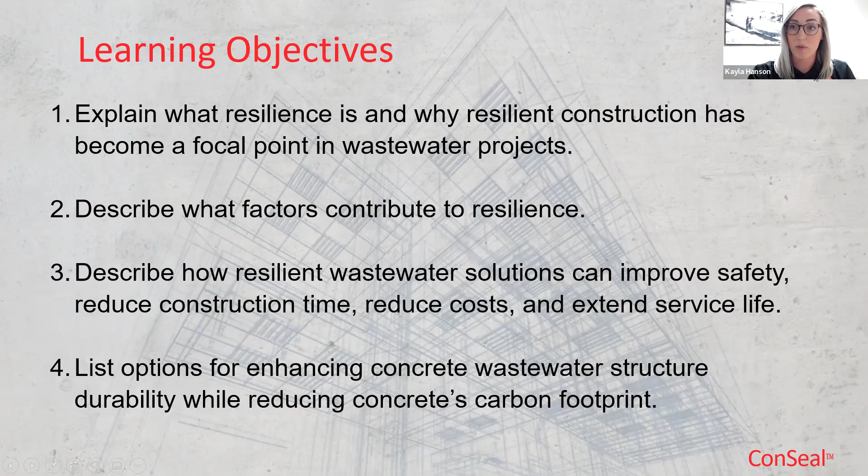I want to start this session out with a little trivia session. It's not so much a quiz and a test of knowledge as it is just an opportunity for us to think about some facts and figures specific to US wastewater infrastructure. Since we're virtual, you don't have to raise your hand, but just quiz yourself in front of your own computer and give these questions some thought.

Question number 1: How many publicly owned wastewater treatment systems are there in the US? Is it 14,000, 15,000, or 16,000? The answer is a little over 16,000. So what this tells us is that there's a lot of maintenance, cost, and upkeep associated with these 16,000 publicly owned wastewater treatment systems.

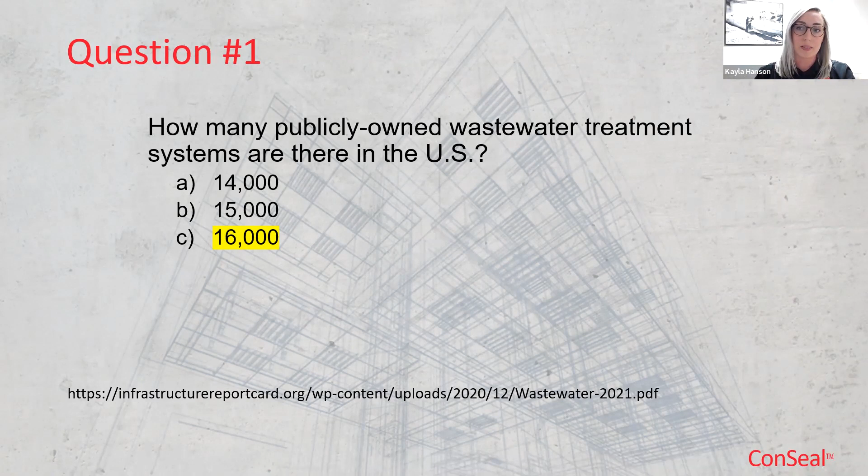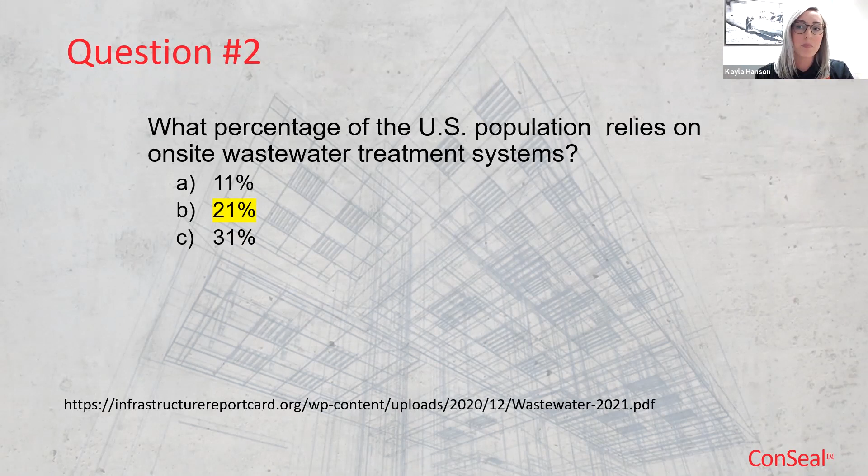Next question: what percentage of the US population relies on on-site wastewater treatment systems? Is it 11%, 21%, or 31%? This one typically surprises people, it's 21%. And the point here is that's almost a quarter of the US population relying on on-site systems, a much bigger portion than people tend to think.

The third and final question: across all sizes of wastewater treatment plants, systems are operating at an average of what percent of their design capacity? Is it 62%, 75%, or 81%? The answer here is 81%. At first thought, you might think, oh gosh, 81%, that's not so bad, that's the best news we've heard so far. But I want to remind you that this is an average. So what that means is that some plants are operating at 50% capacity, while others have met or are trying to exceed their capacity.

The point of sharing these statistics is to share the scope of the need and the demand we're facing. Whether we choose to move forward with on-site systems or centralized systems, truly it takes a combination of both. But whatever the solution, we've got limited resources and increasing needs to tend to. So it's increasingly important that we look to durable, resilient solutions to meet these needs and make the most of the resources we have available.

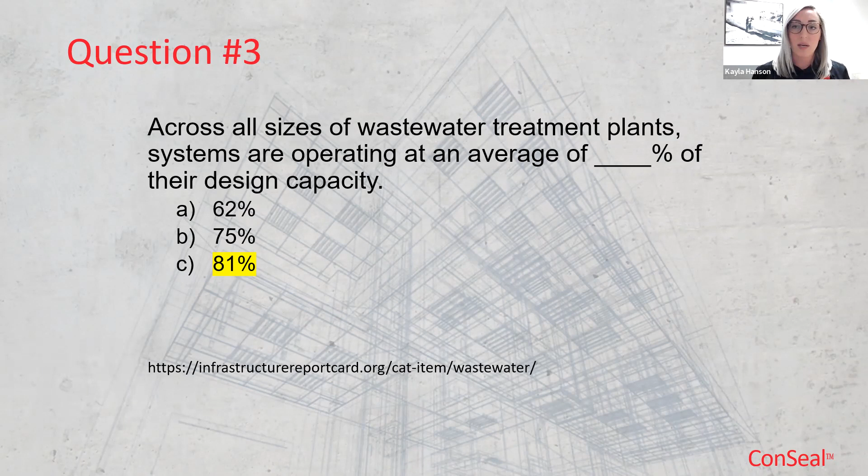A few more facts and figures here, all from the infrastructure report card. By 2032, it's expected that 56 million more people will attempt to connect to centralized treatment plants, a 23% increase in demand. Recall, on average, these treatment plants are already operating at 81% of capacity, so we're trying to add another 23% increase on top of that. Additionally, wastewater infrastructure needs, including repair, rehabilitation, and new construction, exceed $271 billion. There's a lot of demand here.

Third, the Clean Water Act is turning 50 this year. Why does that matter? Well, when it turns 50, it doesn't just expire. The key here is that a lot of wastewater treatment facilities, plants, and systems are designed with a 40 to 50 year service life. So with the Clean Water Act turning 50, a lot of these structures put into service around its inception are approaching the end of their design life.

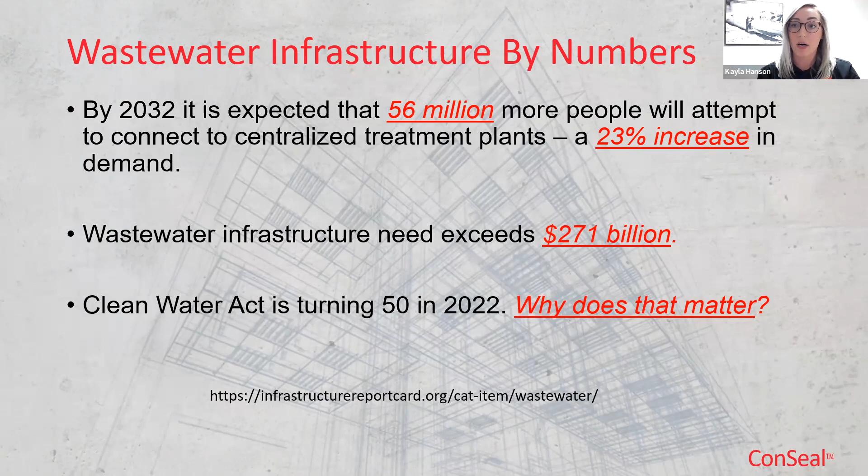They're approaching the end of their anticipated service life. So that exacerbates the need for additional construction, additional rehabilitation, additional repair, and additional new construction.

So I want to talk a little bit about the infrastructure report card. ASCE, the American Society of Civil Engineers, every few years assesses each state in 18 different infrastructure categories, everything from wastewater, stormwater, roads, bridges, airports, dams, schools, levees, you name it. They assess each state on these categories and give them a grade on an A, B, C, D, or F scale.

Overall, the US's grade for wastewater infrastructure is a D+. It sounds pretty abysmal, and it is, but it's actually improved over the last couple of years. Previously it was like a D or a D-, but these grades are really eye-opening, and the information they have on their website is really telling.

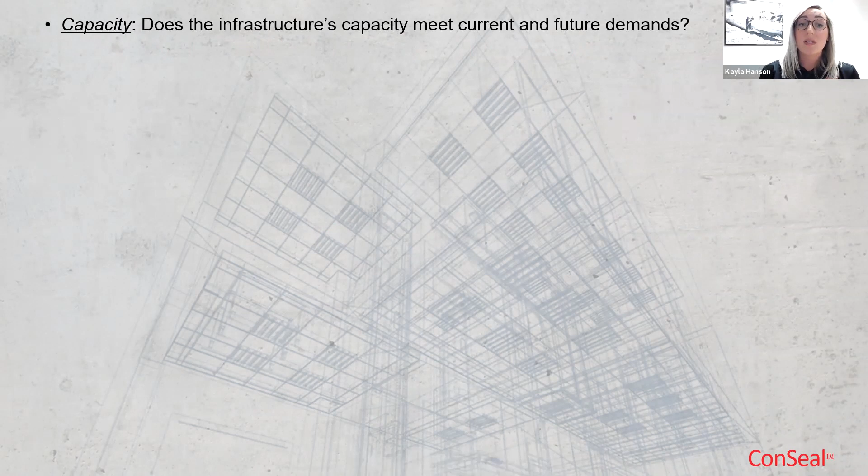So what goes into one of these grades? Let's take a look. The first factor they consider is capacity: does the infrastructure's capacity meet current and future demands? What about its existing condition right now, as well as its near future physical condition?

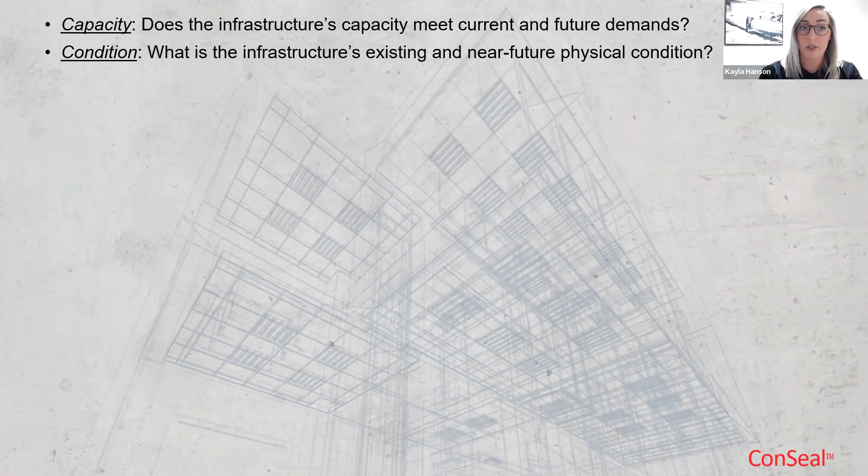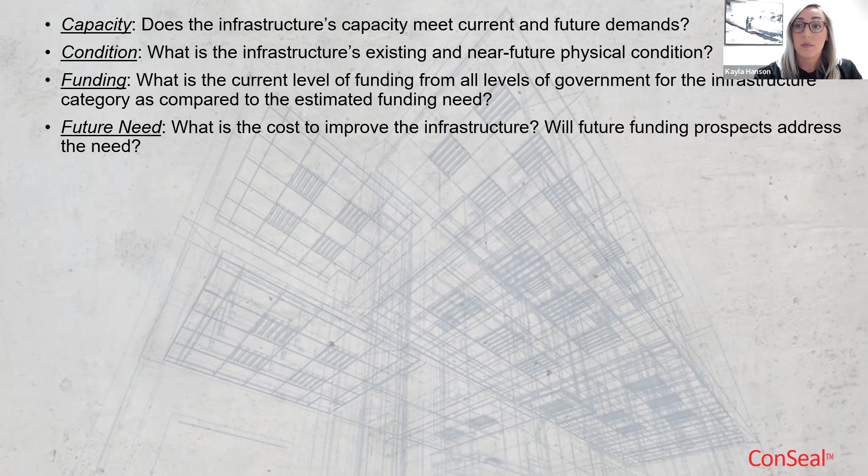What about funding? What is the current level of funding from all levels of government for this infrastructure category compared to the estimated funding need? What about future need? What's the cost to maintain and improve the infrastructure? Will the future funding prospects address the need that exists, or will we have a deficit?

What about operation and maintenance? What is the owner's ability to operate and maintain this infrastructure properly, and is it in compliance with government regulations as codes and standards change?

What about public safety? To what extent is the public safety jeopardized by the condition of this infrastructure, and what could be the consequences of failure? We'll talk about failure a little bit more later.

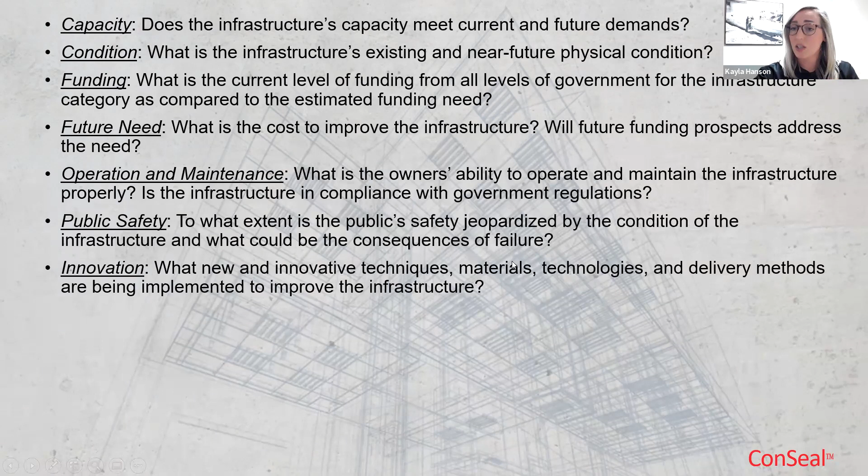What about innovation? What new and innovative techniques, materials, technologies, and delivery methods are being implemented to improve this infrastructure? And last but not least, resilience. What is the infrastructure system's capability to prevent or protect against significant and multi-hazard threats and incidents? How able is it to quickly recover and reconstitute critical services with minimum disruption, with minimum consequences to public safety and health, the economy, national security?

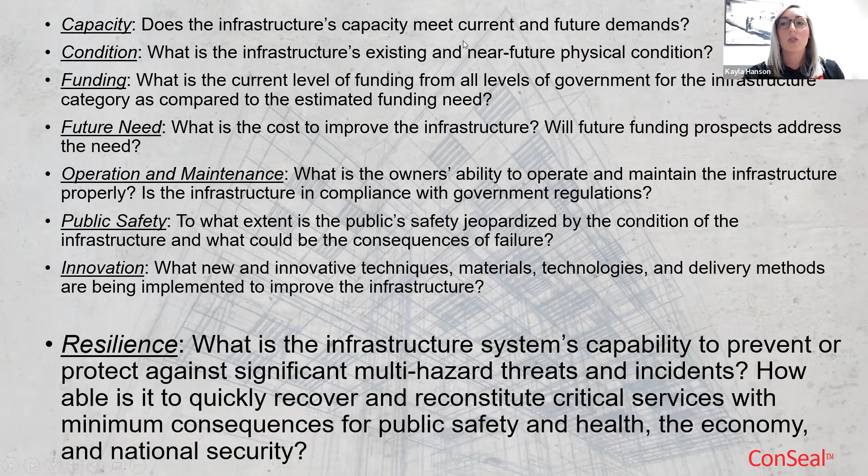So what is resilience? Resilience is the capacity to adapt to changing conditions, and it's the ability to maintain or regain functionality and vitality in the face of stress or disturbance. It's the ability to bounce back after a disturbance or interruption. It's also the ability to absorb or avoid damage without suffering complete catastrophic failure, and the ability to rebuild or repair faster and for less cost.

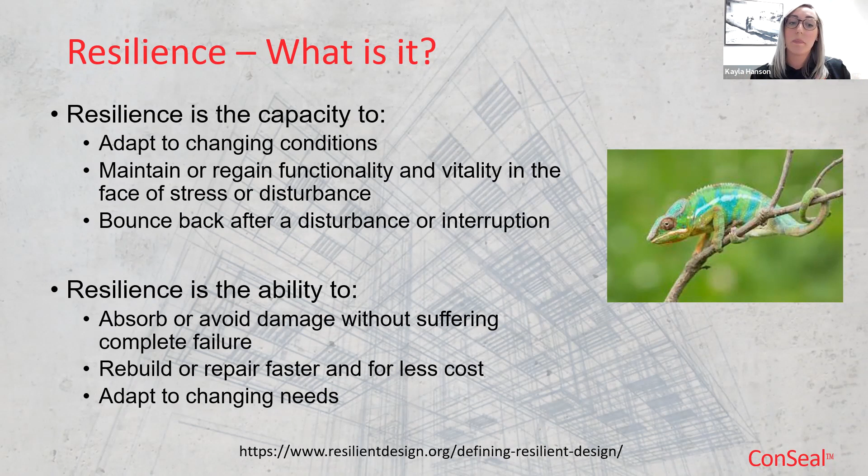It gives us the ability to adapt to changing needs, because the needs we have today aren't going to be the same needs we need to keep in mind in 10 years, 20 years from now. It's the ability to regain and maintain functionality in the face of adversity, and the ability to rebuild or repair faster and for less cost.

Resilience provides protection against natural and unfortunate man-made disasters, including fires, hurricanes, floods, tornadoes, earthquakes, extreme heat, and terrorist attacks. In resilient design, we want failure to be predictable, and we want to make sure it's not catastrophic. We want it to be proportionate to the cause, or less severe in comparison to the cause, not disproportionate.

The double negative is kind of confusing, but essentially this can trip some people up because we're talking about being able to predict failure. In design, we anticipate certain loads, certain forces, certain flow rates, certain volumes. We know it's going to be a certain amount, and then we bump it up a little further for a more conservative approach. On top of that, we add in factors of safety to be even more prepared for outliers and extreme conditions. But when we're talking about failure being predictable, what we mean is that if something were to happen, we want to know how it's going to fail.

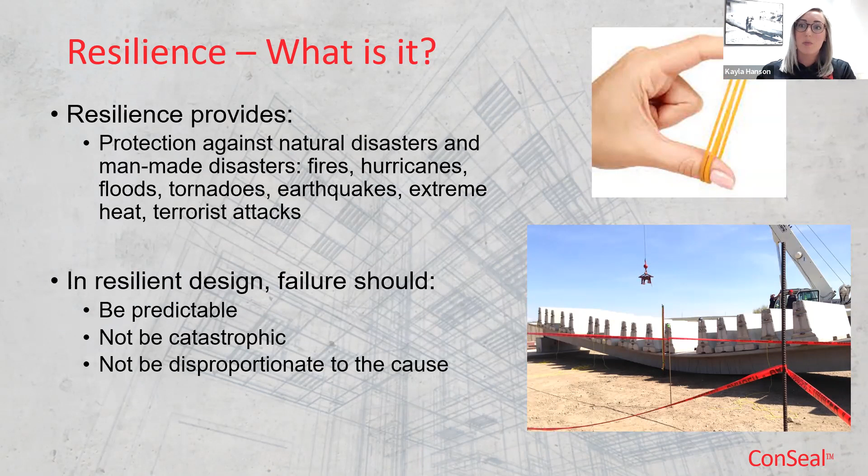So by planning for some outliers, putting in really conservative factors of safety, and designing with resilience in mind, we can gain those benefits without all that extreme cost. Really it comes down to a combination of sustainability and durability—we're building with durability as our focus, but applying sustainable principles and practices.

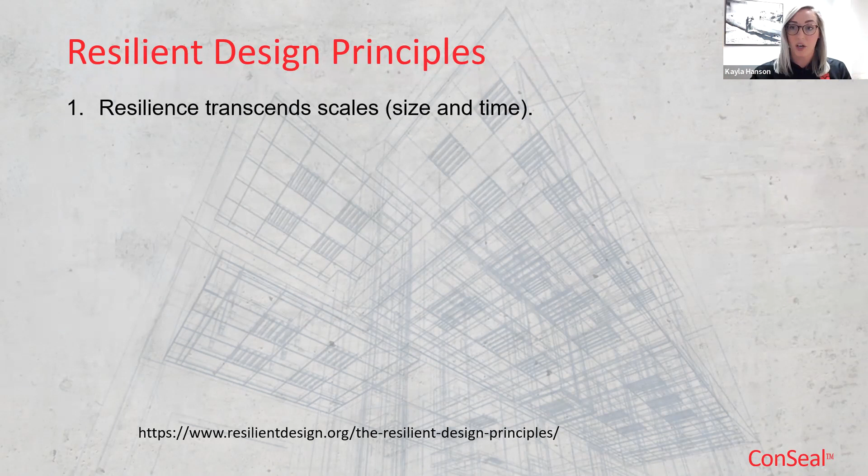It also transcends time. There are short-term things we can do immediately, and longer-term things we can plan for and build up to.

Additionally, diverse and redundant systems are inherently more resilient. The one example I always like to use is a bridge truss. If a single truss in a bridge would fail, the entire bridge isn't going to come crashing down. That would be incredibly catastrophic, dangerous, and too risky. So there's redundance in that design. If one of those members or components of the truss would fail, the system is still going to stand up. It's still going to be fine. So having diversity and redundance in these systems will make them more resilient, more likely to stand up to adversity, whatever that may be.

Additionally, simple, passive, and flexible systems are more resilient. The more bells and whistles and contraptions and reliance we have on electricity and Wi-Fi and things like that, those are all things that could fail, all things that could go wrong. So when we're relying on simple or passive systems, like gravity separation in a septic tank, or a leach field to treat effluent, those are passive systems. They just happen on their own. We don't have to interrupt them, or hope that the generator kicks on and keeps everything up and running. So when we have these simple and passive systems, they're more resilient.

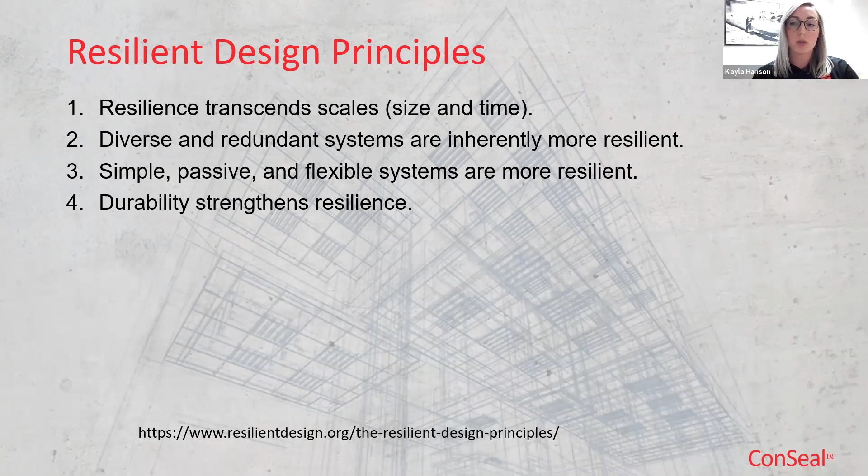Additionally, durability strengthens resilience. We're talking about resilience as a combination of sustainability and durability. The key here to resilience is standing up to adverse conditions and being able to rebuild faster in the face of adversity. So when we have durable, strong, long-lasting materials, that enhances the system's resilience.

Additionally, locally available, renewable, and reclaimed resources are more resilient. Whenever possible, we want to source these materials, source these structures, source these solutions in our local area. We don't want to have to rely on shipping something halfway across the globe to achieve this solution.

Additionally, resilience anticipates interruptions and a dynamic future, right? That's what we've been reiterating, that we want to prepare for the unexpected, prepare for changing needs, prepare for outliers and be able to stand up to them and withstand them in a way that we can bounce back faster after those threats have passed.

Additionally, we want to find and promote resilience in nature. The last presentation we had was actually about constructed wetlands. And when we see something in nature that works well, humans often copy it. It's not just specific to wastewater, it's true in a lot of different capacities. Think of camouflage, or the design of airplanes, for example. So whenever we can find resilience and success and ease in nature, we want to mimic it if we can.

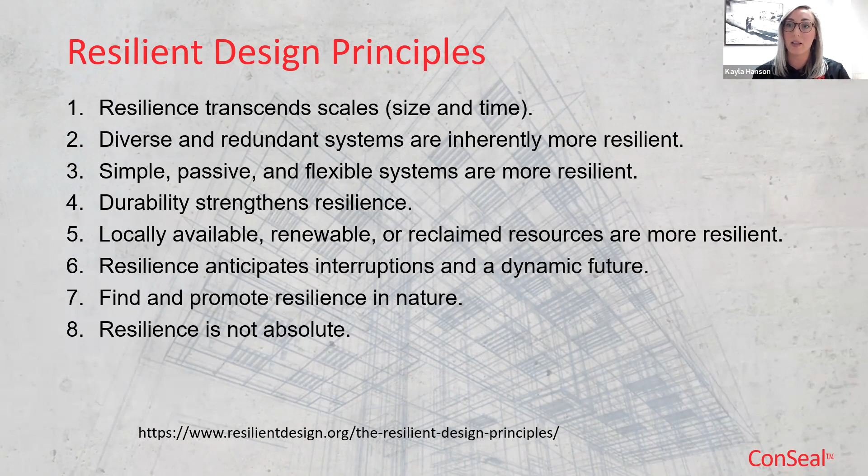And resilience is not absolute. It's not all or nothing. It's not something that we have to go from 0 to 100 immediately, or we're never going to have any improvement. There are small steps that we can take to make a difference and start to make our infrastructure more resilient. We don't have to go from 0 to 100 immediately to see improvement.

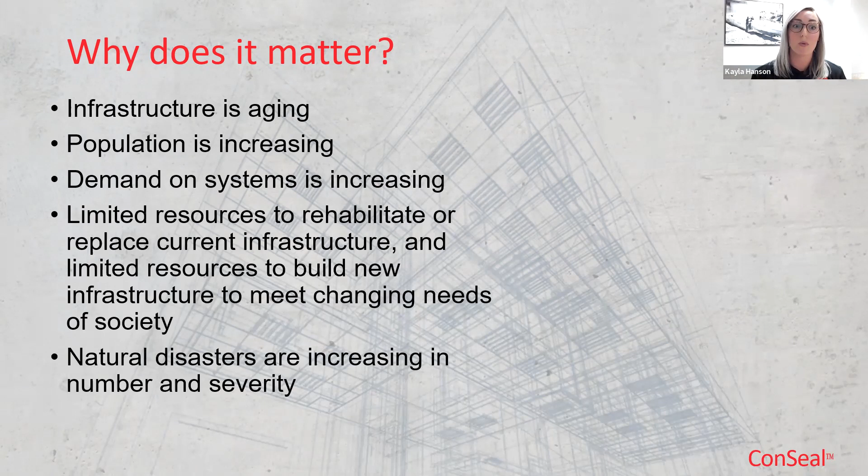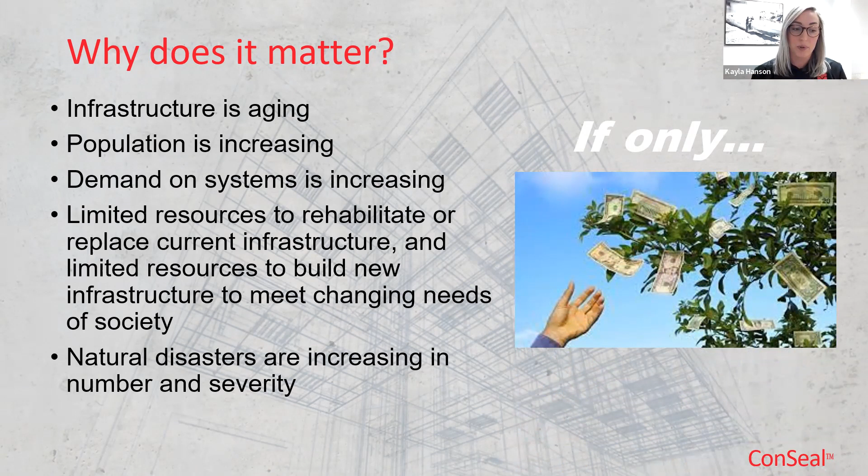So why does this all matter? Well, our infrastructure is aging, populations are increasing, demand on systems is increasing, and there's limited resources to rehabilitate and replace current infrastructure, and limited resources to build new infrastructure that meets our changing needs as society evolves and grows. And natural disasters are increasing in number and severity. Now, even if money grew on trees and we had unlimited resources, it still wouldn't really solve these root problems and provide solutions to these challenges.

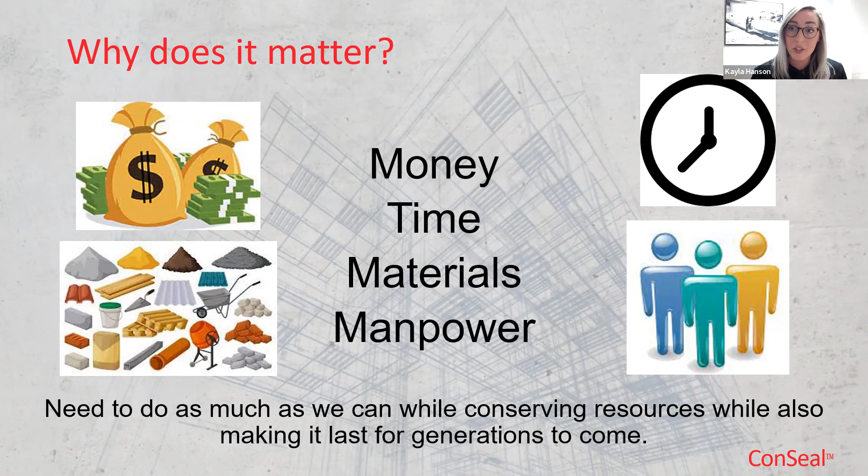So it comes down to money, time, materials, and manpower. We need to do as much as we can while conserving resources, while also making these solutions last for generations to come. And it sounds daunting, and at times it can be, but it's completely doable. It's completely feasible. We know how to do it. We have the roadmap to achieve this.

So how do we do that? Well, resilience really needs to be the goal of design, the goal of maintenance, and the goal of restoration for both individual structures, entire infrastructure systems, and entire communities. And it begins with comprehensive planning. This also means stricter codes and standards that will produce more robust structures and systems that have long service lives. A lot of times people think, well, gosh, codes and standards, don't like that, it just makes my job harder.

When we talk about stricter codes and standards, the concern is that it's going to make people's jobs harder. But that's not the intent, and that's not really realistic. The idea behind making codes and standards more robust is to give us better solutions, to challenge the status quo, and make us think about better raw materials we can use and stronger design philosophies we can implement, not just satisfying our current need but also thinking about long-term solutions.

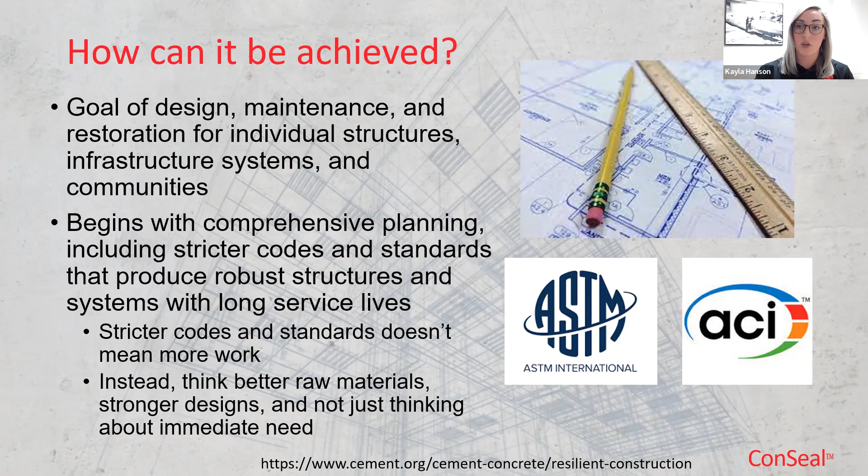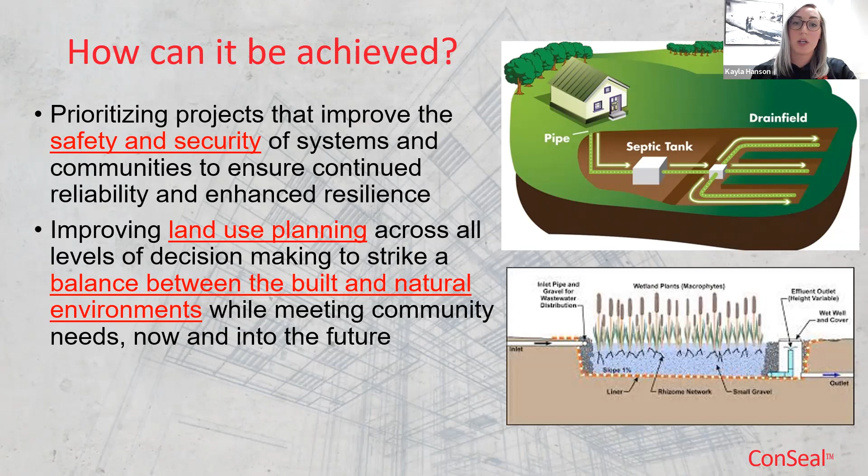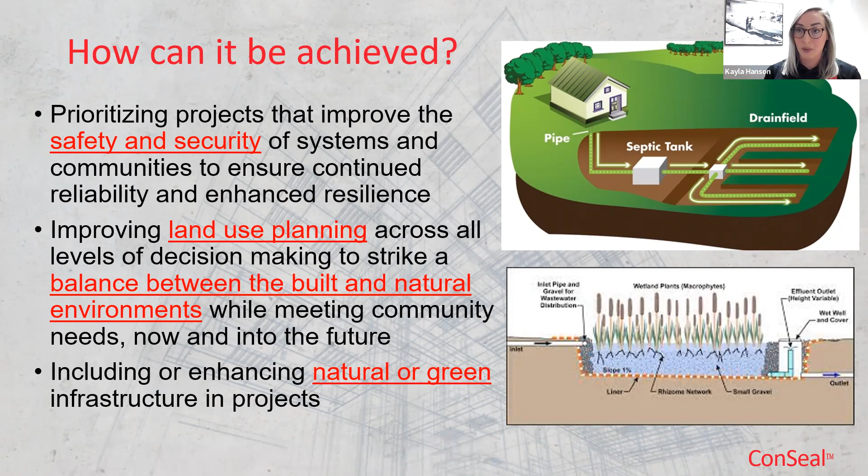Some other ways we can achieve this is by prioritizing projects that focus first and foremost on safety and security, improving safety and security of systems and communities to ensure continued reliability and enhanced resilience. Also improving land use planning across all levels of decision making, striking a balance between the built environment and the natural environment, and including or enhancing natural or green infrastructure projects, which comes into play a lot in on-site applications.

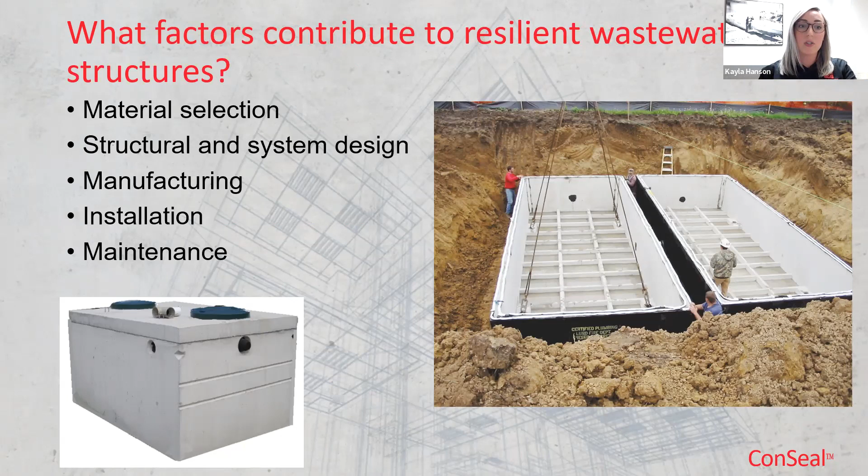So what factors will contribute to resilient wastewater structures? Well, first and foremost, it starts with material selection, then structural and system design, manufacturing, installation, and maintenance. We're going to talk about all five of these subtopics a little bit.

First up is material selection. When we're looking for materials to build these wastewater systems with, we want to select materials that are strong, that are durable, that are appropriate for their intended use, and that have sustainability and their environmental impact in mind. We want to make sure we're selecting products that will stand up to the environment they're going to be exposed to for their entire service life.

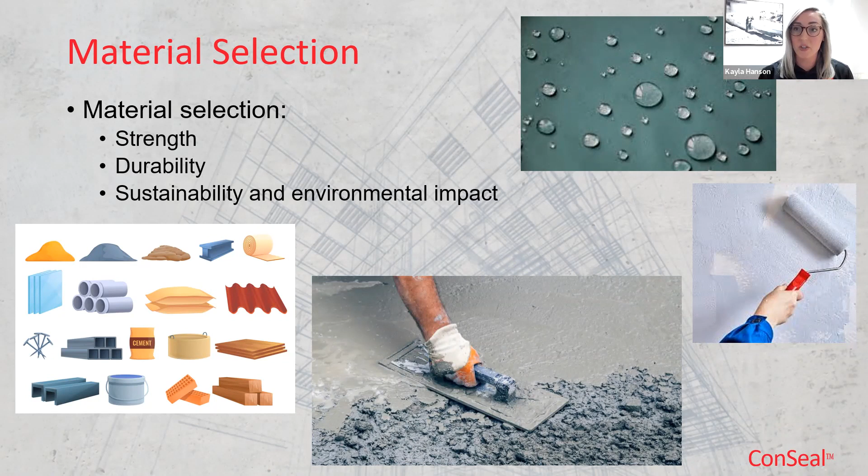We want them to provide durability, we want them to provide long service lives, and we want them to be able to resist these harsh conditions and be able to bounce back.

Then talking about strength and durability, specifically in wastewater applications, we need these materials and structures to be resistant to leaks. They have to be watertight. We need everything inside these structures and systems to stay inside until they're ready to go out through the intended outlet, and we need everything outside of these systems to remain outside of the systems.

We don't want any infiltration or exfiltration, because if water or rainwater infiltrates the tank and comes inside, it'll disrupt the treatment system going on inside the tank. And of course, we don't want anything outside the tank to leak out, because it could contaminate the surrounding environment.

So these structures need to be resistant to leaks. They need to be resistant to freeze-thaw cycles, abrasion, chemical and biological attack, thermal fluctuations, and impact, just to name a few.

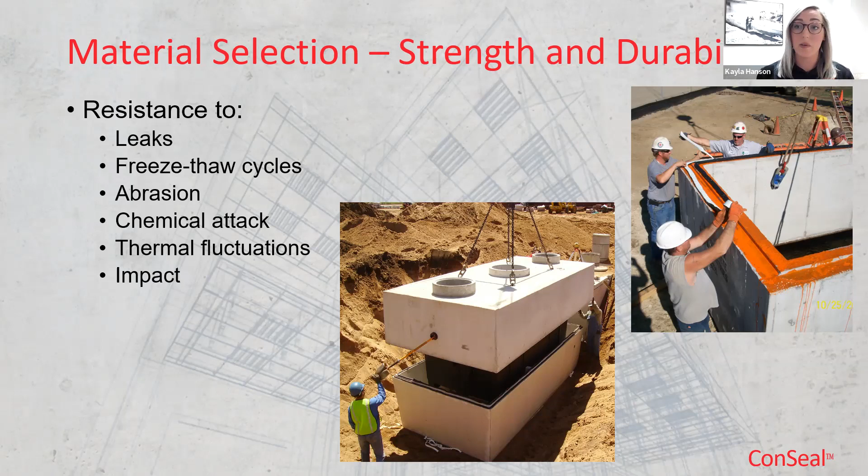We're talking about resilience being a combination of both sustainability and durability. So it's important to also think about the sources of these raw materials. There are naturally occurring raw materials that work great, there's recycled options, there's man-made materials, and we want to think about the energy intensity of the manufacturing process of these materials, and whenever possible, source these raw materials locally.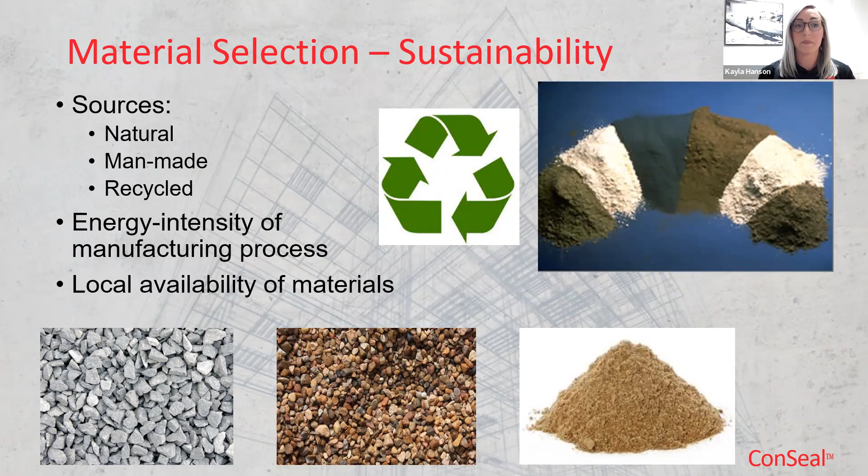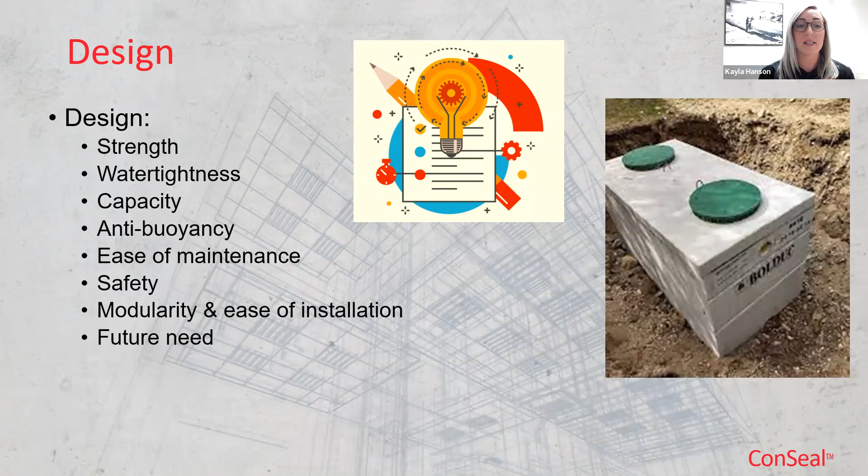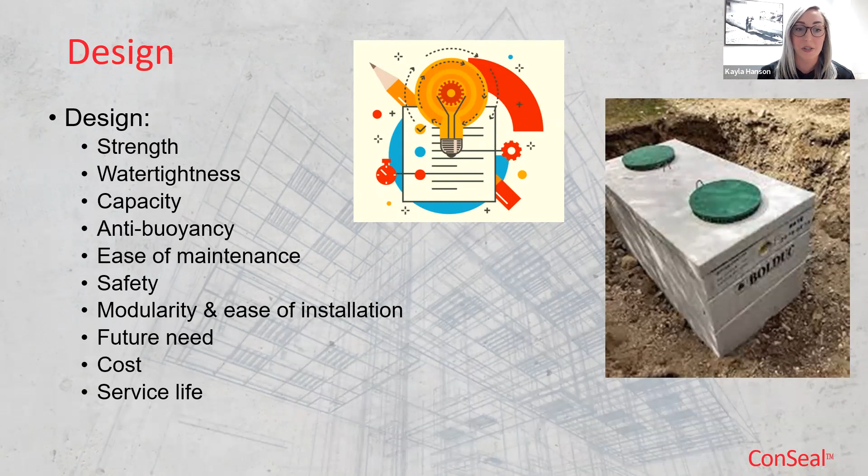Now when it comes to the design of these wastewater systems, we have to think about strength, water tightness, capacity, resistance to buoyancy, ease of maintenance, safety, modularity, ease of installation, future need, cost, and service life. There's a lot of factors that come into play here, and we're going to talk about each one of them.

First up is strength. When it comes to the design of these structures, first and foremost, it has to be strong. So we need to follow applicable codes and standards, and we have to select design options that will withstand the anticipated loads. We know these service conditions, we know the environment these structures are going to be installed in, and we also need to be prepared for outliers. Even when we incorporate factors of safety into the design, there's always going to be an outlier, so we have to be prepared for that.

So thinking about depth of bury, the soil loads, the hydrostatic loads, where is the water table when it comes to these underground structures. Sometimes we have to consider traffic loads and impact loads, and of course we're always taking into consideration a factor of safety.

Now on the far right here, I have a screenshot of ASTM C1227. This is a product standard for precast concrete septic tanks.

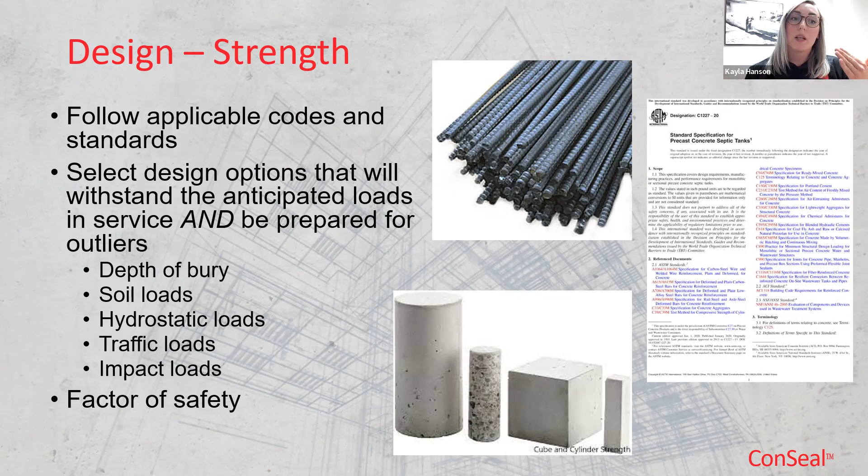This outlines requirements for raw materials, the manufacturing process, testing, design, dimensions, you name it. Following these codes and standards helps ensure a certain level of reliability. If anybody's just making a septic tank without following any particular roadmap to success, we don't really know what we're getting in terms of quality, reliability, and service life. So following applicable codes and standards is critical in these applications.

We also need to design for water tightness. We want to select designs and materials that enhance water tightness to protect not only the integrity of the system and its performance inside the treatment system, but also the surrounding environment. We want to keep what's in the tank, and what's outside of the tank. This also impacts the health and safety of the surrounding environment.

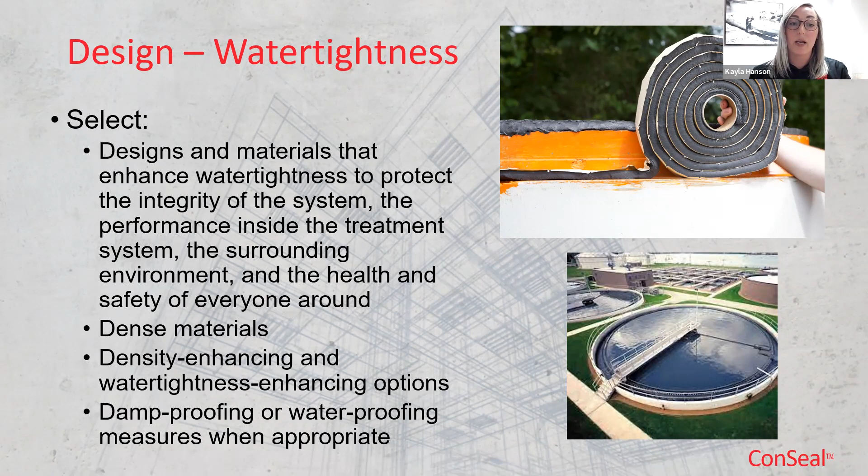So we want to choose dense materials. In wastewater applications, if we choose strong, dense, durable materials, water, wastewater, and contaminants are less likely to penetrate those walls. So dense materials, low permeability, low porosity, help enhance the water tightness of these structures. In many applications, we can choose density-enhancing and water-tightness-enhancing options—we'll talk more about that near the end. In addition, we can take additional measures to help damp proof and waterproof these structures.

What about capacity? We're talking about codes, standards, and regulations, and there are sizing regulations as well. At least in the US, they're generally pretty consistent, but there is some variation from state to state. We want to make sure we're selecting design options that meet our current needs but also accommodate future needs and some growth. We can have too much of a good thing—we can oversize these systems, and we don't want to do that, but we want to be reasonable and accommodate some reasonable growth.

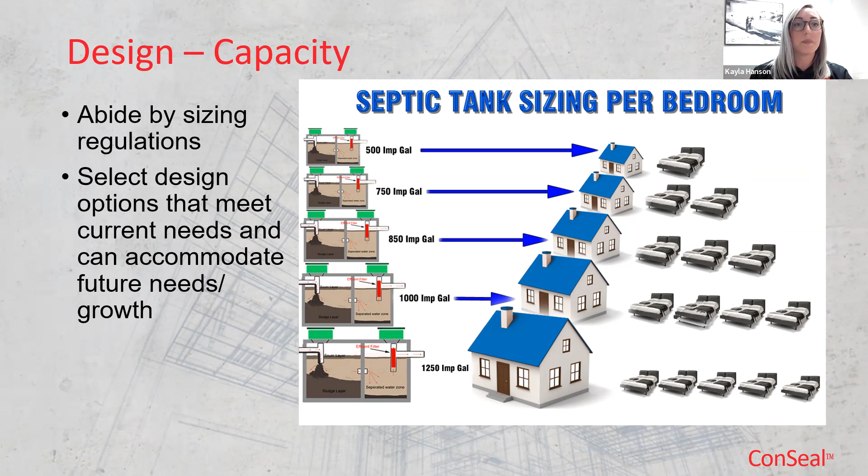Now, what about buoyancy? Typically when people think about buoyancy, they think of things that float in water or air. But in the case of buried structures, in the case of underground infrastructure, these structures can float or shift depending on the water table, the soil conditions, the weight of the structures, and the amount of soil backfilled and buried over them. So we can have instances where these structures will float, pop up out of the ground, or shift if we don't account for those buoyant forces properly.

So we want to make sure we're selecting design options that will resist these buoyant forces—remember, passive and simple systems are inherently more resilient. So selecting options that are inherently resistant to buoyant forces, denser, heavier materials when these structures are buried, providing fail-safe resistance to buoyant forces, and being able to withstand forces that arise in out-of-the-norm conditions.

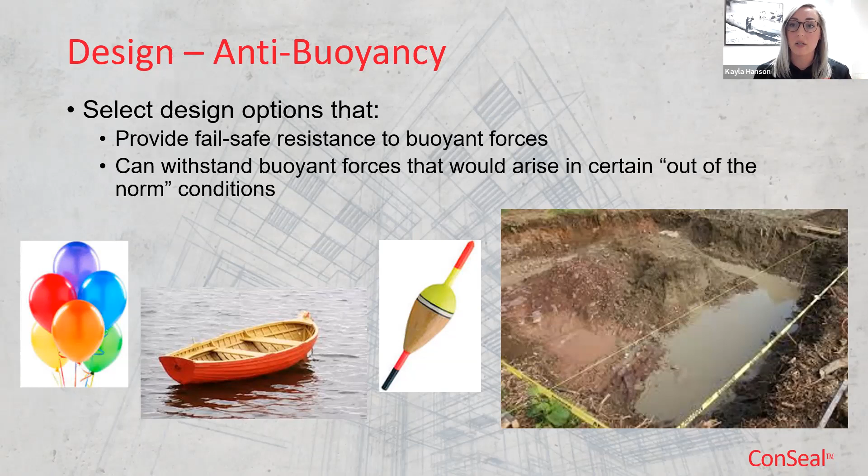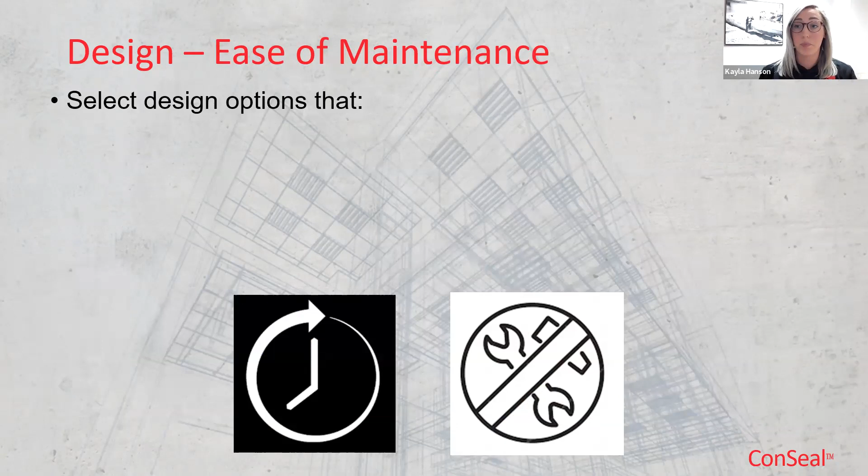So you have a 100-year storm, and we already have a high water table. We want to make sure that even in these outlier, extreme cases, we're able to resist these buoyant forces. We also want these structures to be easy to maintain—this is a huge part of resilience. We don't want to have to go back and constantly repair things or install something new or updated. We want them to be low maintenance, to set it and forget it, with the exception of some routine preventative maintenance.

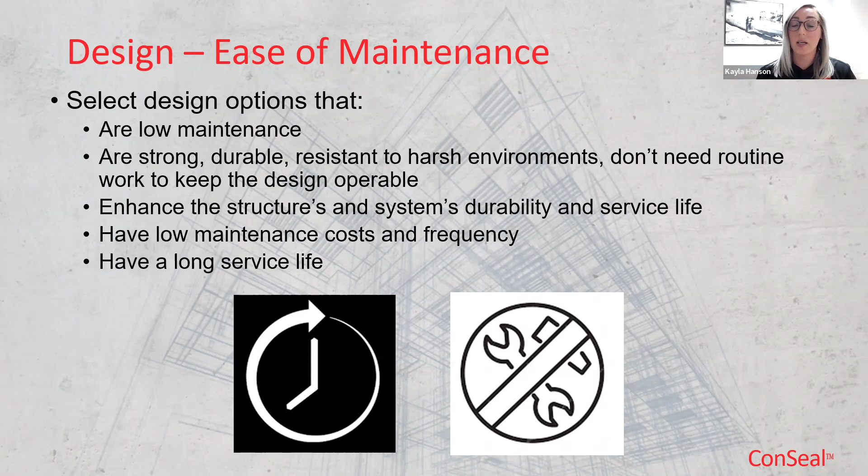So we want to select design options that are low maintenance, inherently strong, durable, resistant to harsh environments, and that don't need a lot of routine work just to keep the design operable. We want to select options that enhance the structure's and system's durability and service life, which in turn provides low maintenance costs and a lower maintenance frequency while giving us a long service life.

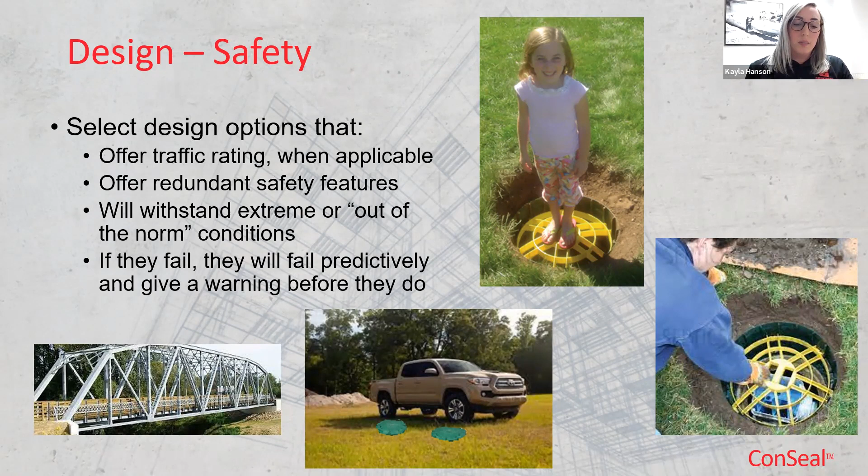We also want these designs to be safe. It seems so simple, but specifically when we're talking about underground structures or buried infrastructure, they'll often need to be designed to withstand traffic loads, so making sure these designs are in fact traffic rated when needed. We also want redundant safety features—we talked a little about that earlier—but if one of the safety features were to fail or not be operable, we want something else there to back it up.

So we're talking about the bridge truss example again. So that brings up this circular yellow contraption. This is specific to underground structures, specifically to septic tanks.

This is a secondary safety device where if the lid were removed or damaged and somehow wasn't keeping the septic tank contained, this secondary safety device is installed underneath the lid so that if the lid was damaged, removed, or not replaced, it prevents animals or people from falling into the tank. Oftentimes if a child or animal falls in the tank, they lose their lives.

So having redundancy in design and in safety is really important. We want to make sure that we're able to withstand these extreme or out-of-the-norm cases. And if they do fail, that the failure is predictable, not absolutely catastrophic. We know how it's going to fail, we know what's going to happen, and we can plan for it.

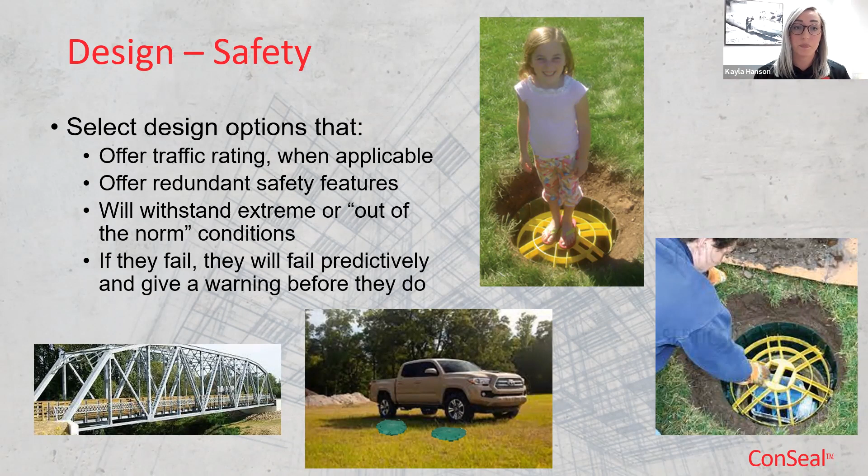Also, selecting design options that are modular and easy to install—this is a huge one. If we can select design options that are quick to install on site, with a whole bunch of these features installed at the manufacturing facility before it even gets to the job site, it results in less labor on the job site. So less cost, less time, and less labor on the job site.

And when we're able to install these things faster, when so much is already done—it's all modular, done before it even gets to the job site—we can close up this excavation faster, we can shut down this construction site faster. That results in cost savings and it really improves safety. We don't have this excavation open, we're not using all of this expensive equipment for days, weeks, months longer. It's done pretty darn quickly, pretty efficiently.

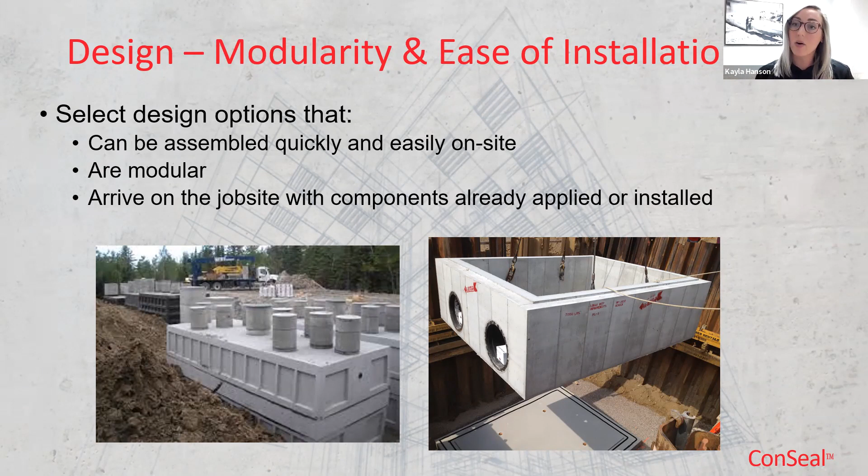So when we can have modular designs and components that are pre-assembled, pre-installed before they even get to the job site, that also enhances resilience.

We also want to think about future need—selecting design options that will accommodate future needs within reason, because we can't predict everything, and we can over-design it to the point where we're not really getting anything back out of it. So we want to make sure we're designing for future needs as best we can and trying to make these designs adaptable, and if possible, making them so they can be retrofitted to accommodate those changing needs or changing capacities in the future.

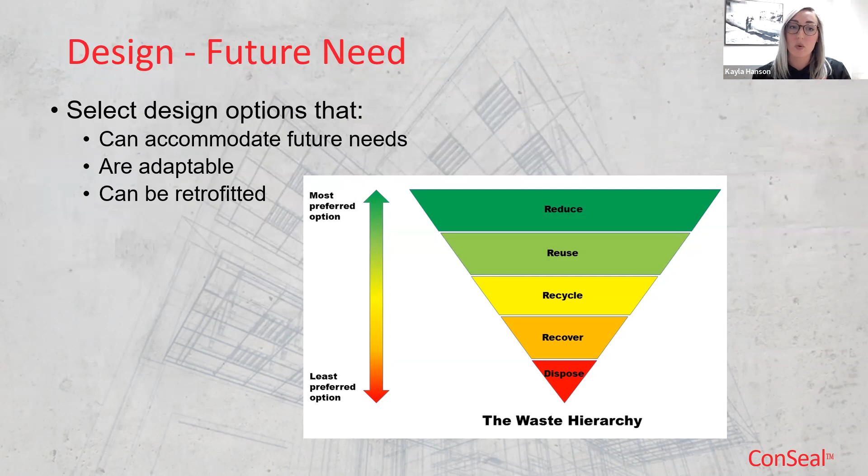We have to think about the costs that exist below that water line. Think about the maintenance needs, upgrade costs and frequency. What are the operation costs? How frequently do we have to inspect it? What do the repair costs look like? What does the disposal cost look like at the end of its service life?

So a lot of times, I'll pick on asphalt versus concrete roads—a lot of times cities and municipalities, if the roadway conditions are just atrocious, full of potholes, at least in the Midwestern US that's a big issue every year. Asphalt is cheaper up front compared to concrete, but the service life isn't as long. So to make the most impact in a short amount of time with as few resources as possible, cities will repave roads with asphalt, knowing this is a cheaper solution but it's not going to last very long. They know going in they'll have to repair or replace it in just a couple of years, but they're trying to do what they can with limited resources—though it doesn't solve any long-term problems.

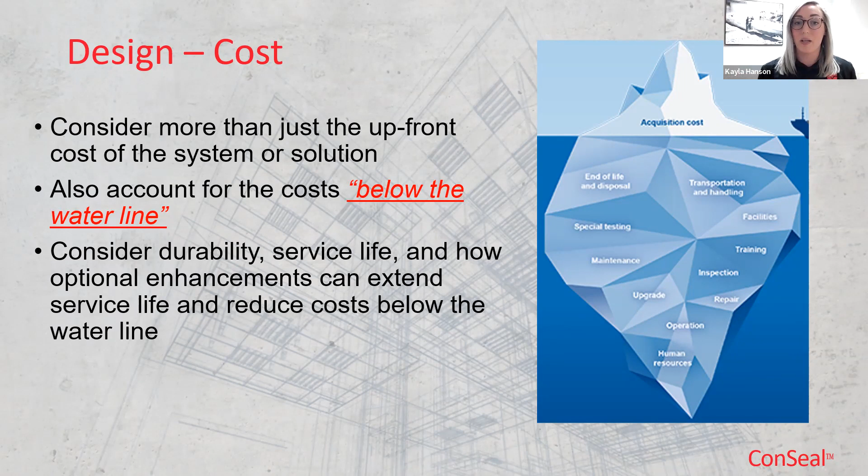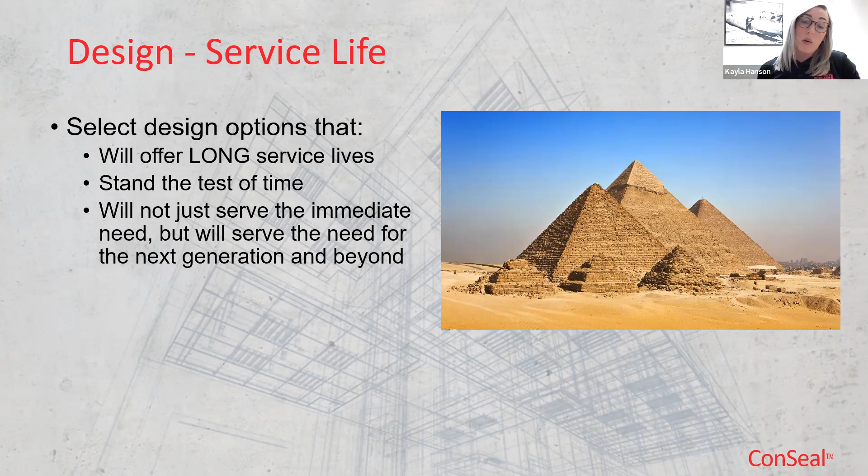Opting for these optional enhancements, which come at an additional cost over alternative solutions, can really extend service life and enhance durability and resilience. We want options that will last a long time. We don't want to have to come back and constantly repair something or replace it in just a few years. We want to select options that stand the test of time and serve the need for generations to come.

Manufacturing is another factor in resilience. We're talking about production processes, manufacturing duration, quality assurance, quality control, and testing. QA and QC are two totally different things.

Quality assurance is process oriented and all about preventing defects—it's a proactive approach. Quality control, on the other hand, is product oriented. It's about going back to check our work and our finished product to identify any defects—a reactive strategy. But together they make a complete system, and they help ensure that whatever gets installed and provides this solution meets our needs and expectations.

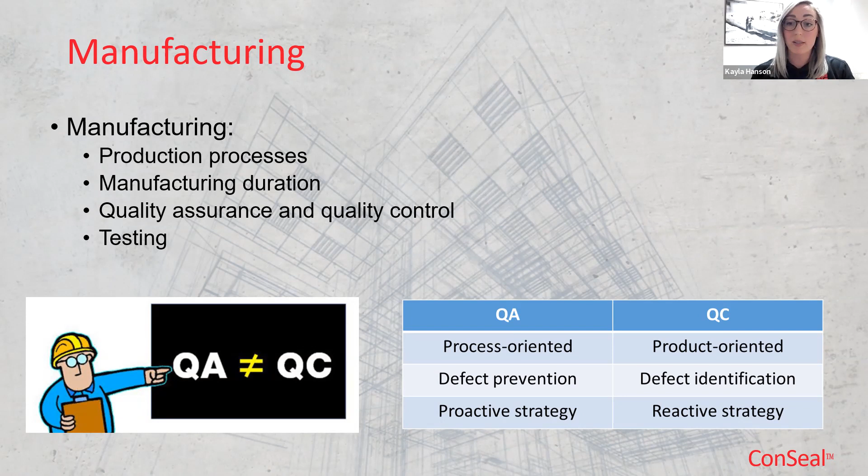When it comes to installation, it's always critical to follow the manufacturer's instructions and industry best practices. It's probably not something people typically think of when selecting resilient design options, but it's important to consider construction time and transport distance—remember, we want options that are locally available whenever possible—as well as handling, setting, bedding, foundation, and backfill requirements.

One resilient design principle was selecting passive, simple solutions. Sometimes installations can become so complex that they turn into engineered installations instead of engineered solutions and products. Selecting options with more passive installation means they're inherently strong, durable, and dense—they're not going to move around, and they don't need bells and whistles to keep them in place.

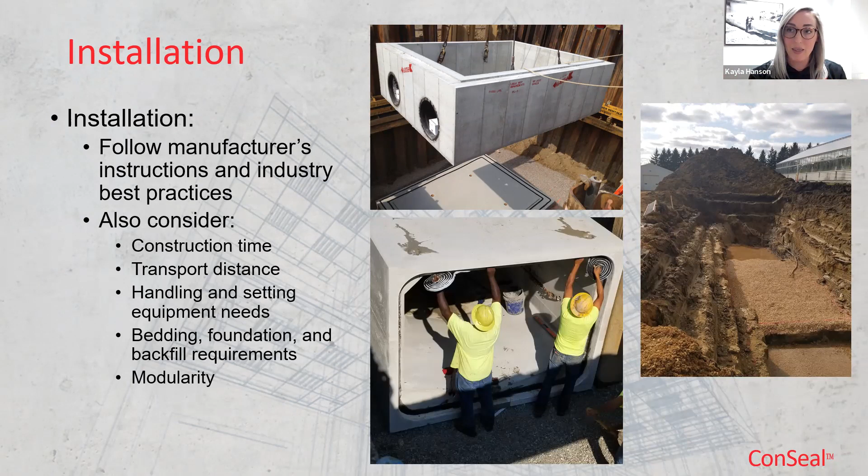We also want to select options that are low maintenance. We want routine, scheduled, proactive inspections, but we want to select options that reduce the frequency of those inspections in the first place, and we want timely maintenance with proper repair materials and procedures.

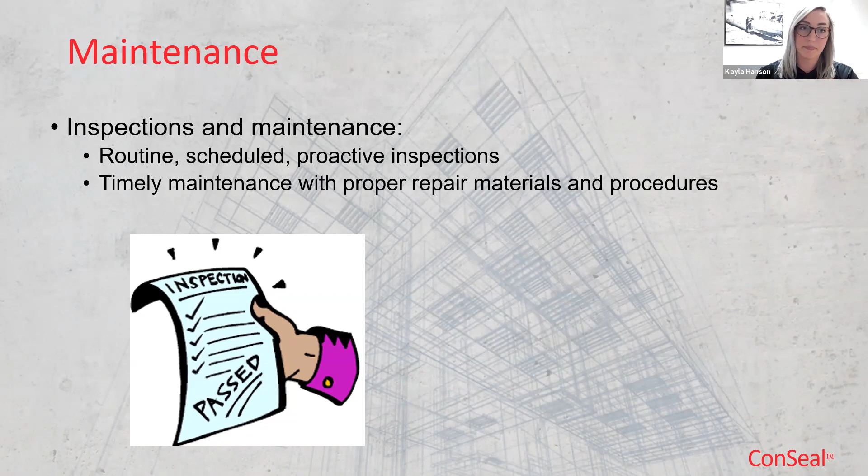We've talked a lot about concrete wastewater infrastructure, and something specific I wanted to call out is precast versus cast-in-place concrete. Precast is manufactured in a controlled environment—fresh concrete is poured into forms, allowed to cure, and stripped 24 hours later, then transported to the job site at a later date. Cast-in-place concrete is poured into its final location and cures out in the field.

Because precast concrete is cast and cured in a controlled manufacturing environment with diligent QA and QC, in some cases we can actually have thinner sections and less concrete compared to cast-in-place. So a resilient solution could be using precast instead of cast-in-place in certain applications. Additionally, because it's manufactured in a controlled environment, it can often be constructed faster with less disruption, less cost, and enhanced safety, since less needs to be done on the job site.

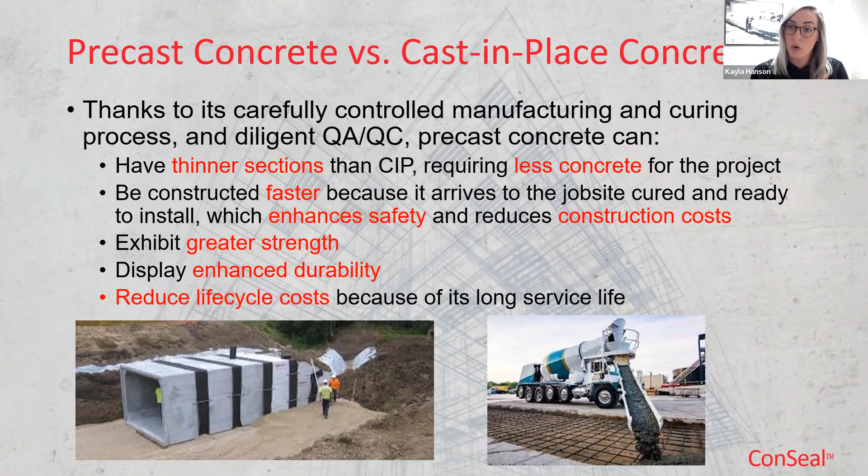That excavation doesn't need to be open as long. And again, because the concrete is cast and cured in this controlled environment, we were able to optimize all of the characteristics of these raw materials that go into making a batch of concrete. So in some cases, or in a lot of cases, you'll get greater strength, enhanced durability, reduced permeability, and enhanced water tightness with precast as opposed to cast in place. Additionally, we can have reduced life cycle costs because the concrete is more durable and it is more robust and resilient.

So some of the options specific to concrete that can help reduce its carbon footprint and keep sustainability in mind is to use supplementary cementitious materials, also called SCMs. These are used in conjunction with and as a partial replacement for ordinary Portland cement. They enable precast producers or concrete producers to reduce the amount of cement that's needed, and that in turn will reduce costs. And interestingly, they can help increase the density of the concrete as well, which leads to reduced permeability and enhanced durability and water tightness. There's a variety of them, and they can be used in precast or cast in place. It's applicable across the board.

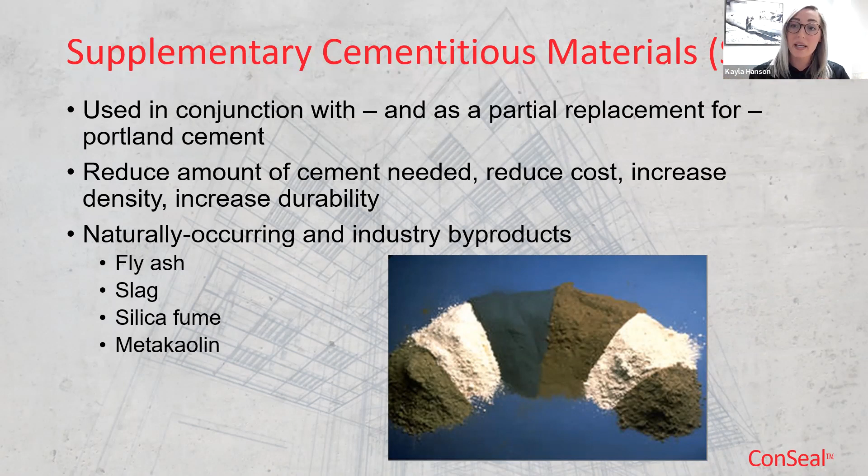Some of these names might sound familiar: there's fly ash, slag, silica fume, and metakaolin, just to name a few of the most popular ones.

Another option is to use limestone cement. Limestone is a naturally occurring material in Portland cement, and typically there's a maximum of about 5% limestone by weight in cement that goes into concrete. But now there's a push to use Type IL cement, or limestone cement, that has a greater limestone content. This helps reduce the carbon footprint of the concrete because less energy intensive material goes into making the cement. So they hold back on some of the other materials and put limestone in, and it's ground really fine to help offset some of the lower strength, so it doesn't impact strength or some of the other characteristics as much.

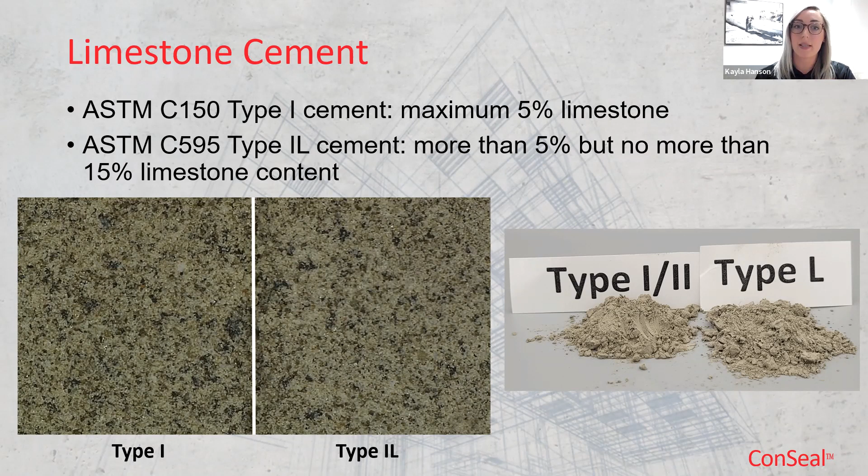Another option is to use durability enhancing admixtures. Chemical admixtures are used in just about every single concrete mix, whether it's cast in place or precast, and they're used for a variety of reasons - sometimes to enhance end product performance, and sometimes to make it easier to work with on the job site. Some options specific to wastewater infrastructure are densifying admixtures, MIC protection (microbial induced corrosion protection), air entrainment, water reducers, as well as corrosion inhibitors. So there's a lot of ways to internally and inherently enhance the durability and robustness of the concrete itself before you even get to things like structural design or installation.

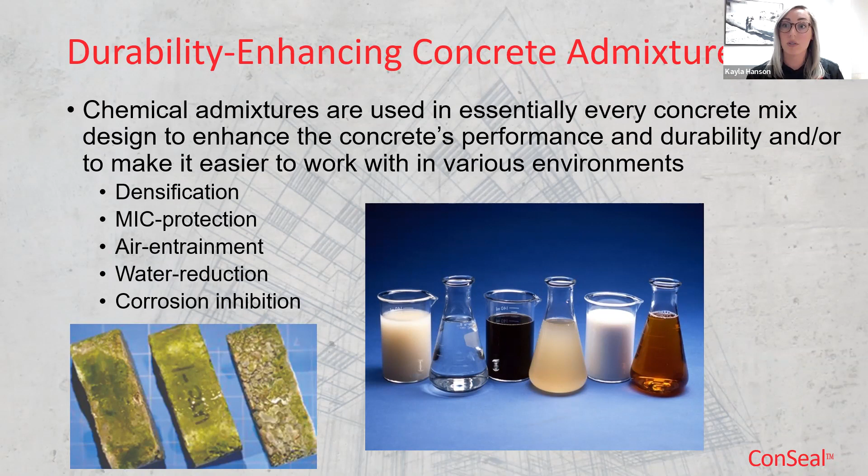There are also options for adding coatings or sealants to the exterior surface to provide damp proofing, waterproofing, or again, MIC protection. Some of these products can also protect against growth of fungus, mold, or algae. So there's a lot of different integral and exterior options to enhance durability and resilience of these structures.

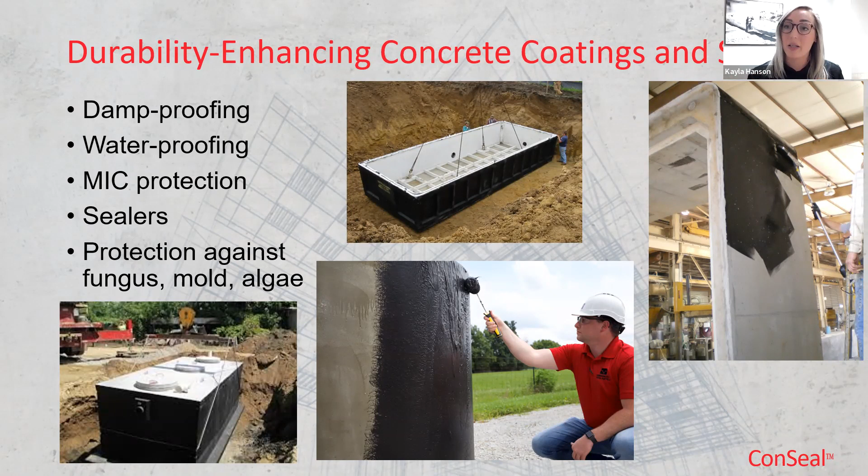All of this comes to play, and all of this really begins with having well-informed stakeholders. And that's what we're all here doing today - we're learning about what our options are, we're learning about some of the challenges we're facing, and we're learning about the solutions that exist. So I thank you all for taking the time to join this session today.

So resilient wastewater solutions really begin with strong, durable, watertight structures. They're sustainable, they provide engineered solutions that are adaptable, they're economical, and they're built with the future in mind, and they're always advancing.